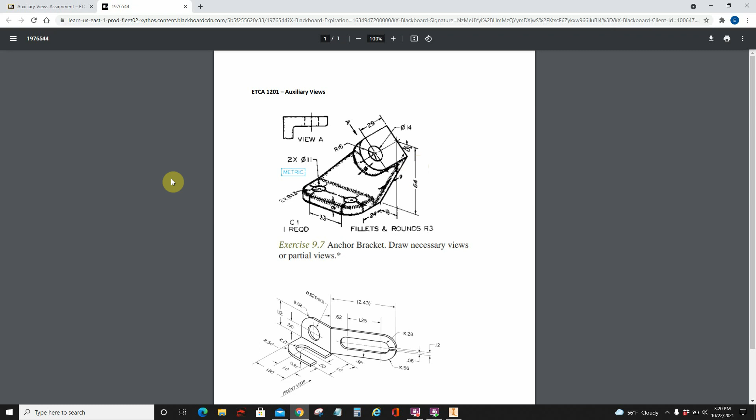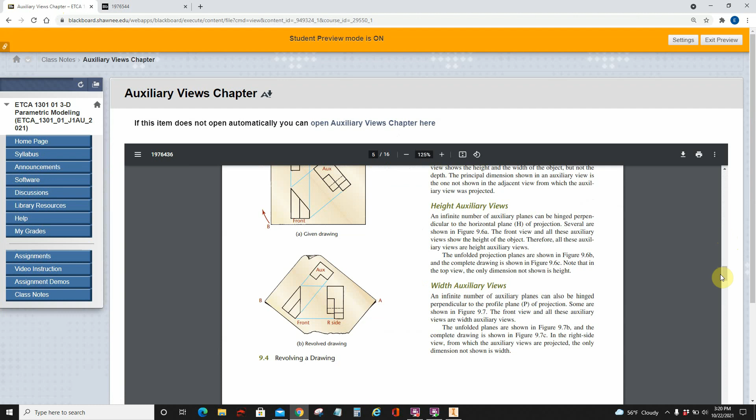All right, let's take a look at what we got here. Auxiliary views - we had the lecture, a little video. Here's the assignment, and I take it that you watched everything. It's also a chapter - I read the chapter about auxiliary views so you know exactly what's going on as far as how we're going to construct these things.

All right, I'm going to jump into construction, starting with the anchor bracket here. And a little construction video for each, and then a drawing video. So start with the anchor bracket here.

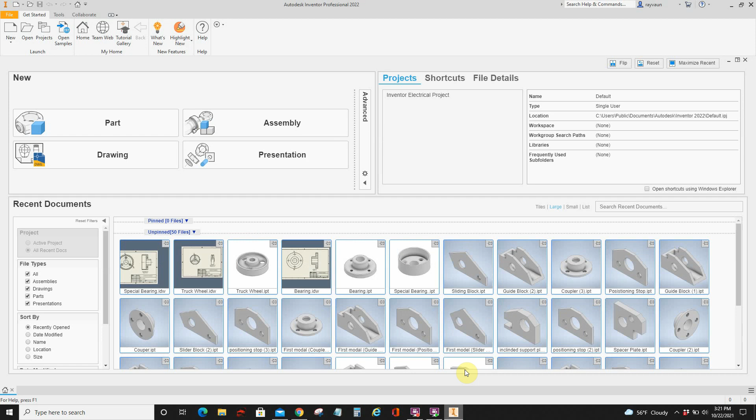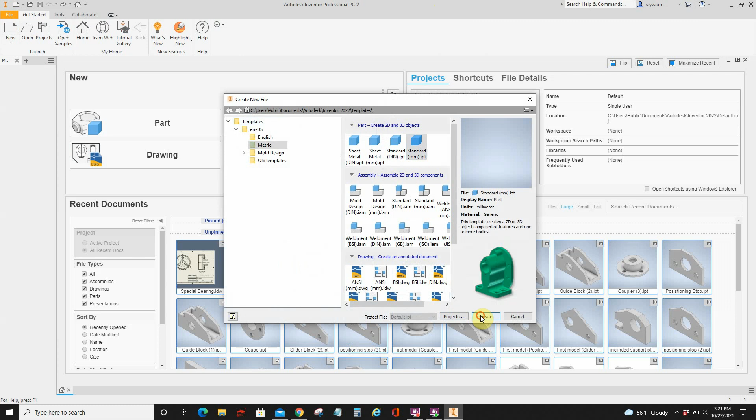And that's metric - metric standard millimeter part. Okay, what happened? Let me try it again. Metric standard millimeter part. There we go.

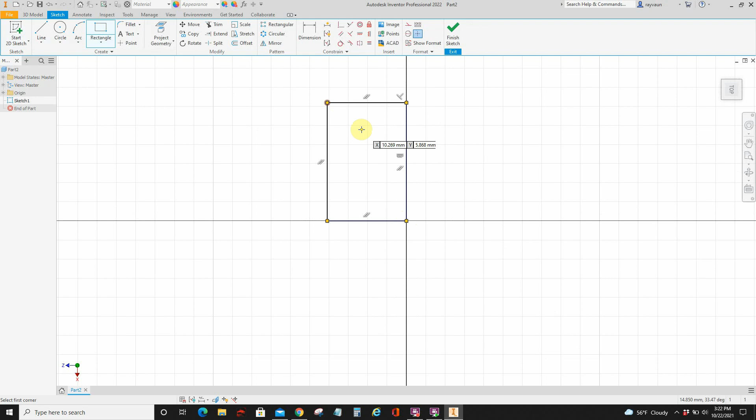What I'm going to do is build the bottom base first and then build off of that, so I'll use this as the plane I'll work on. I'll start with a rectangle here and put those dimensions in.

We got 24 from the back face to the center of the holes, and these got a radius of 13. So that'd be what the total on the bottom would be - 37. So like that, 37. Then we got 33, and 2 radii on each side, because we got 13 here and 13 here, which is 26. So 33 plus 26 is going to be what - 59. That sound right? 33, 26, 59.

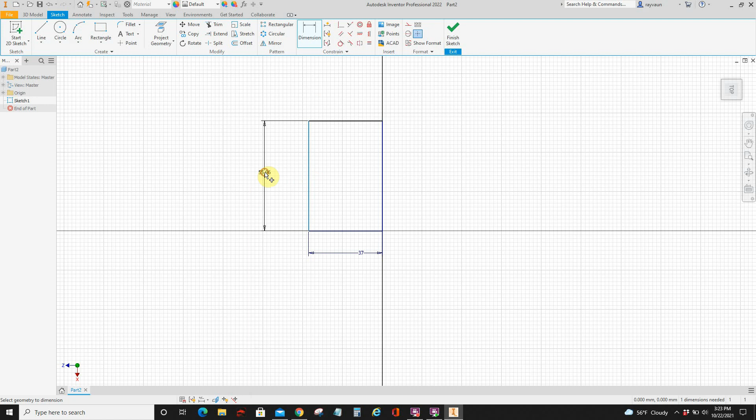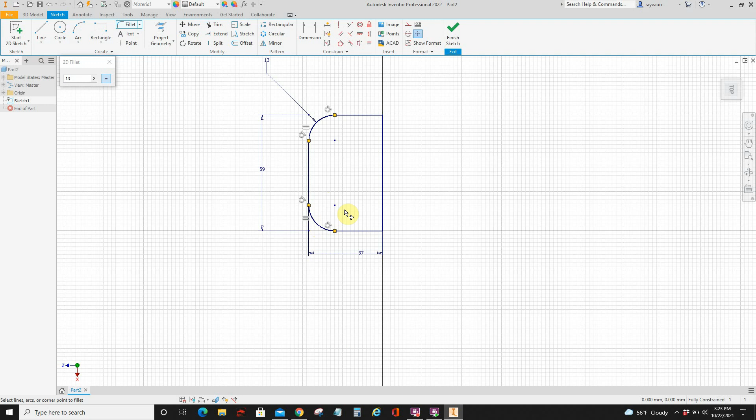Okay, we have a radius of 13, so we'll put them in. Right now, fillet 13, here and here. Then we have holes, 2 holes with diameter 11 that are at that concentric, same center point. Row 11.

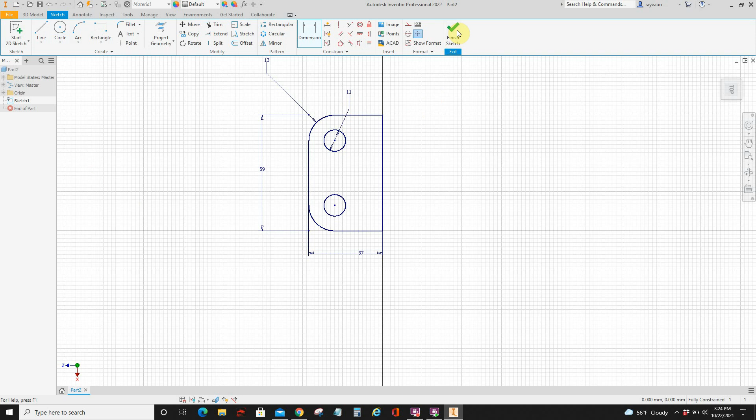Okay, I'm going to extrude this up - coming up 9. So extrude up 9 millimeters.

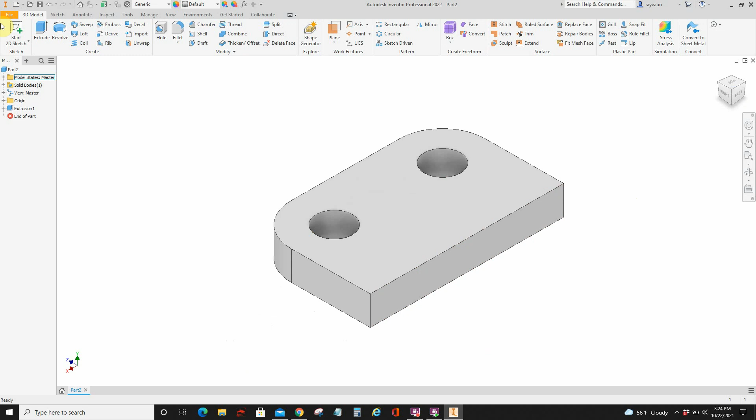Okay, so now we want to build this portion here. So I'm going to put a sketch plane on this face right here. Let me flip it around because I want to draw it from this side. And I'm just kind of drawing this shape here.

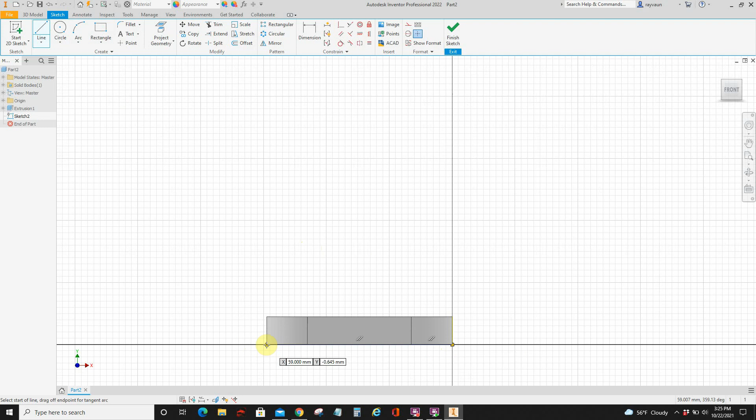It's kind of, well, here, here, here, and then up to here somewhere. And down like so, and then down like that. Thereabouts - something like that.

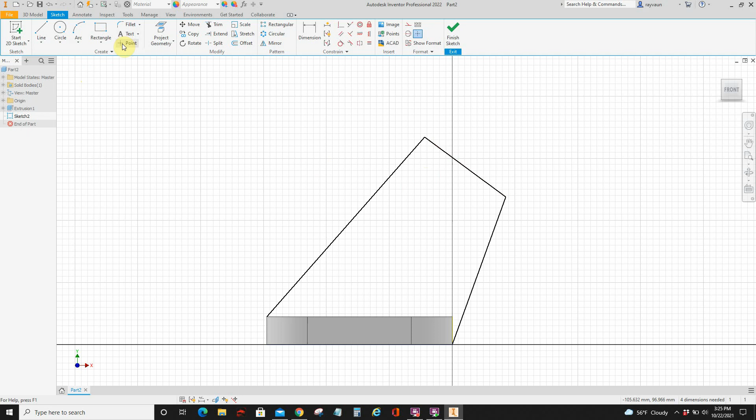We have the midpoint here - we got to measure off this midpoint. So I'm going to put a point on this midpoint so that I can grab it with a dimension line. I'm going to use the point command and stick it on the middle of this line. I'll mouse over till I get that green dot, and I'll place that point there. I don't know if you can see, does it get larger? Not really - there's a point there now. So now I can dimension to it.

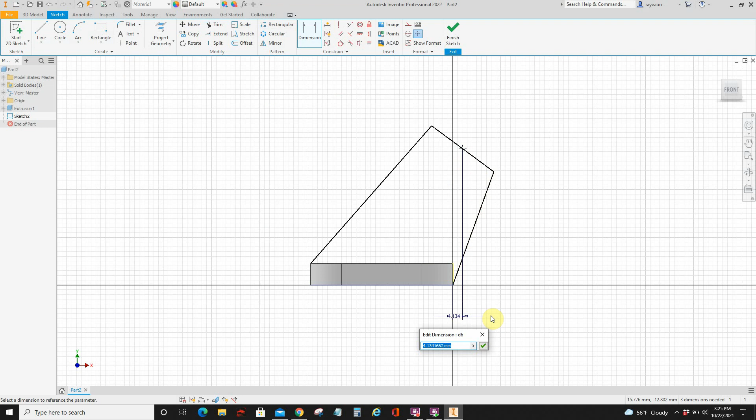So we're 19 over, so we'll put a dimension between this point and this edge - put 19. And we're 64 up, here to here - this is all going to be whacked, 64. And I need a 45-degree angle here.

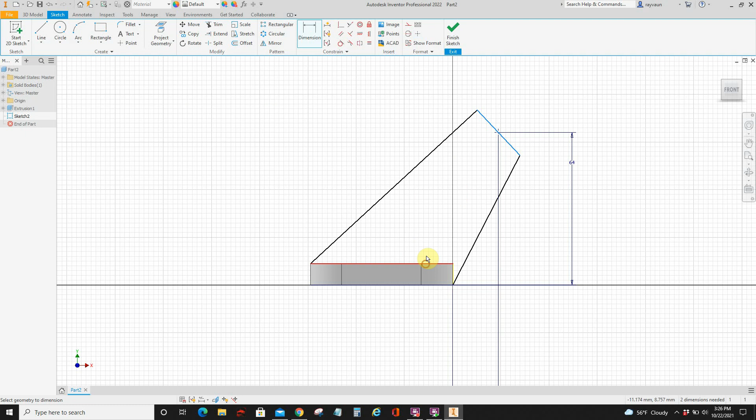I'm going to pull that out like that. There we go - so I need this to be a 45-degree angle. So I'm going to put an angular dimension in between here and here at 45. And this distance is, well, we got a radius of 16, so that's going to be 32 from here to here.

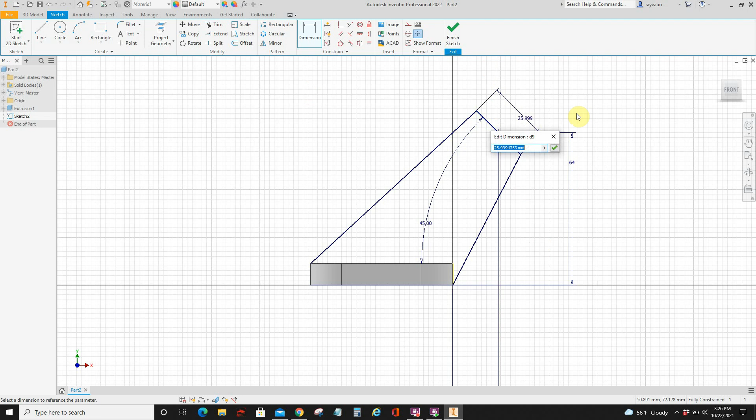16 is 32, so put a dimension - it's an aligned dimension, so don't - make sure that you have an aligned dimension, 32. You don't want to do that - you want to make sure that you have it aligned. Okay, and we got a thickness of 9. And I think I got everything here - 19, 64 from this corner, from down there.

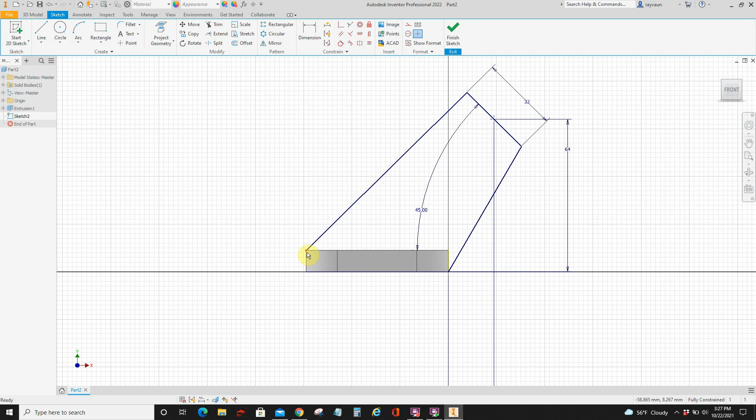Finish the sketch, and we're going to come out with extrusion, flip it, and 9 millimeters. Okay, so there we go - so far, so good.

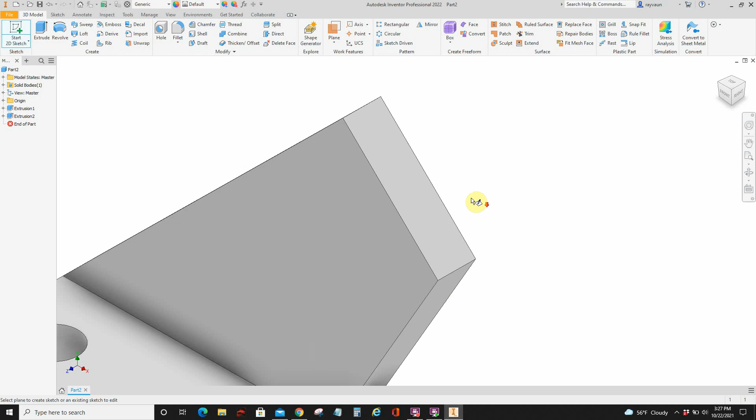Now I want to build this shape, so I'll put a sketch plane on this surface right here. And I'm just going to draw it up here and then move it down later. Put a rectangle, put a circle, midpoint. We got what, 29 millimeters here from center to this edge.

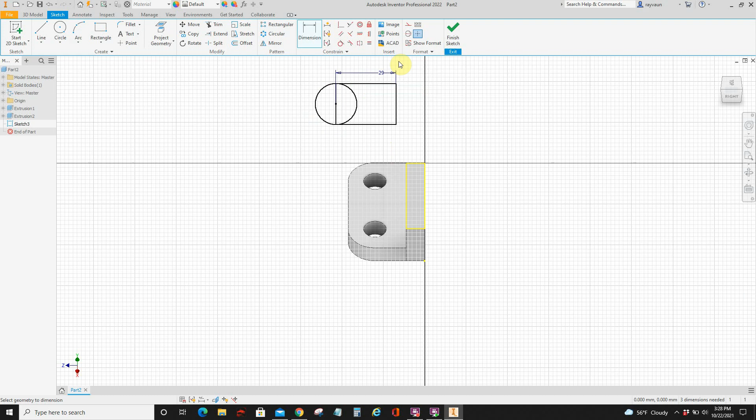We got a radius of 16, so let me trim this out so I get a radius instead of a diameter - radius of 16. Make sure these are tangent too - that's really important.

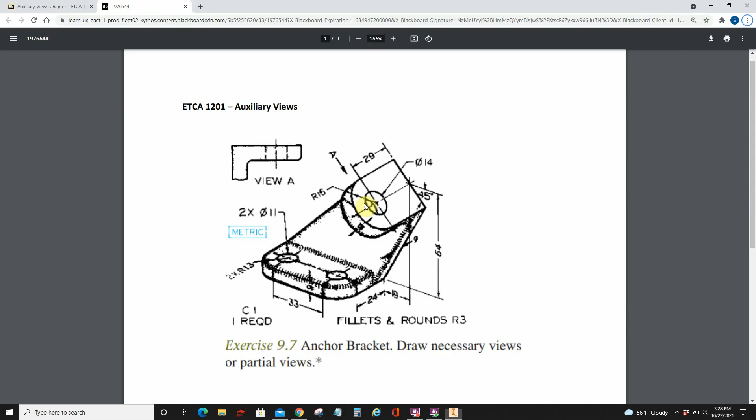And we want a circle with a diameter of 14. I'm going to make sure it's concentric to this arc, so if I move it, it'll move with it. Okay, it's already there.

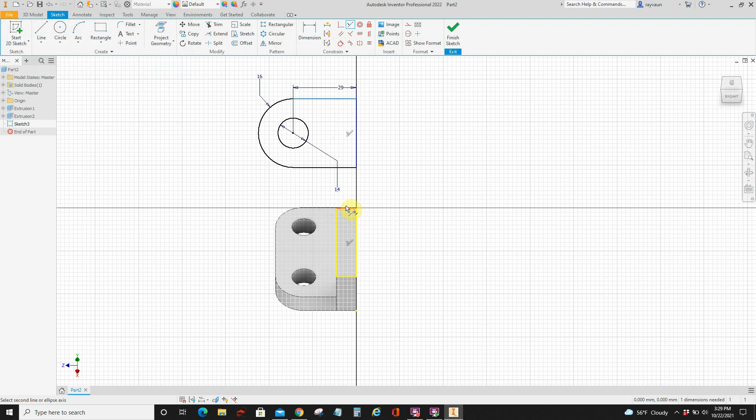So then I'll make this line collinear with this line, and then I'll make this line here collinear with this line there. Yeah, got the right line - you get the right line, not that line, but this line, because they're a little bit off, a little different. Finish the sketch and see it's right on - that's the way we want it. Right there, nailed it.

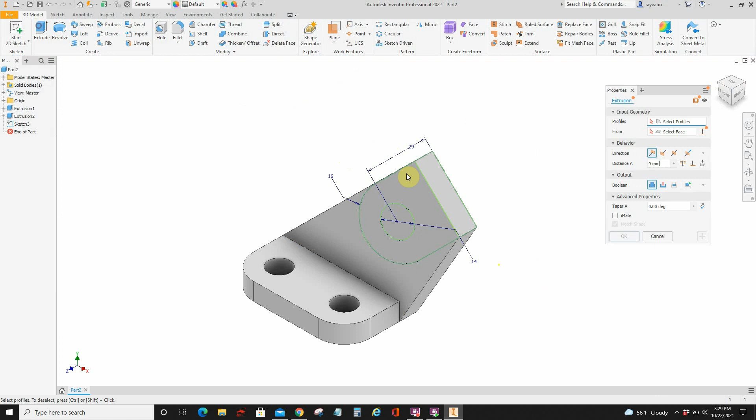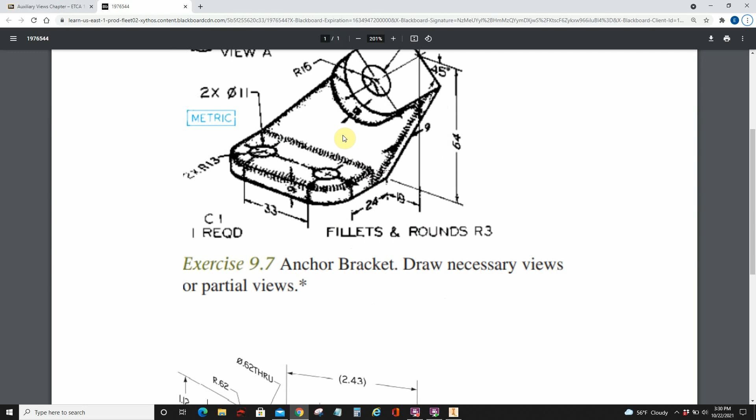Okay, so we can extrude this down - flip that. It's really hard to tell what that distance is, because we got 9 here, 9 here, so you can assume it's 9, but it looks like it might be a little fatter. It didn't reproduce real well - I don't know if it's 10 or could be 10, 12. I'm gonna put 9 - 9 is good, just use a 9, keep it uniform.

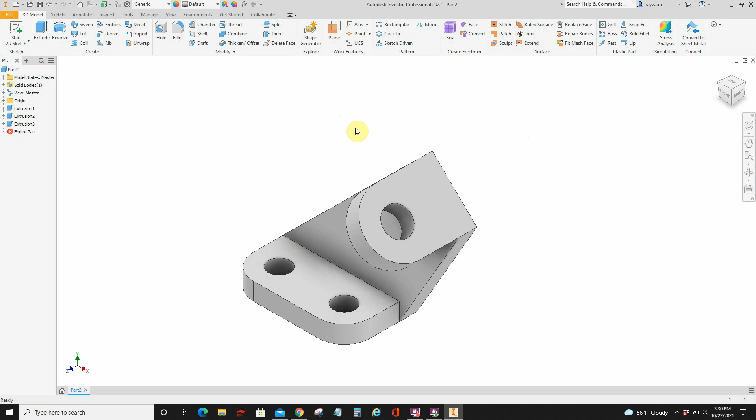Okay, so now we need to put the fillets and rounds in. It's rounded on the front, but you can assume that the back and the top and everything is machined. So you gotta be real careful when you're doing this, because sometimes the way it's drawn, it may take a couple different tries to get all the fillets in.

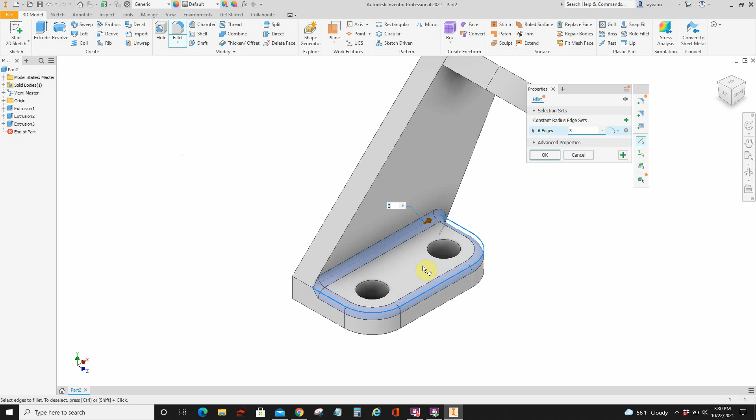Radius 3, so fillet - radius of 3. I'll start down here and do this - see if that works. So far, so good. Where's my apply button? It doesn't have an apply button. Okay, so continue.

I got these new commands in here, I don't know if I like them. I'll put one here - we'll take it, that's good. Let's go up here, get that, and that - so far, everything looks good.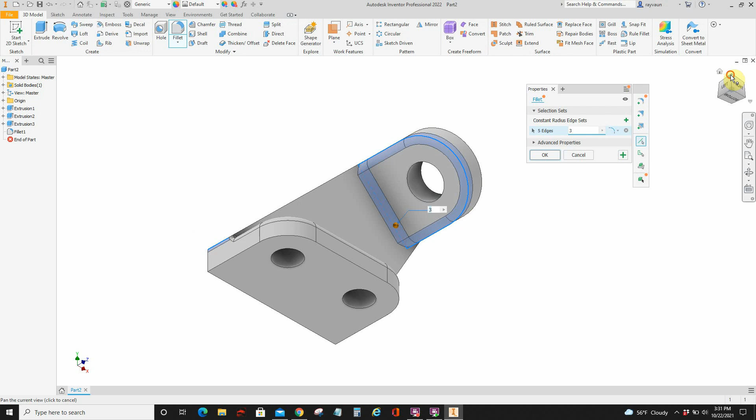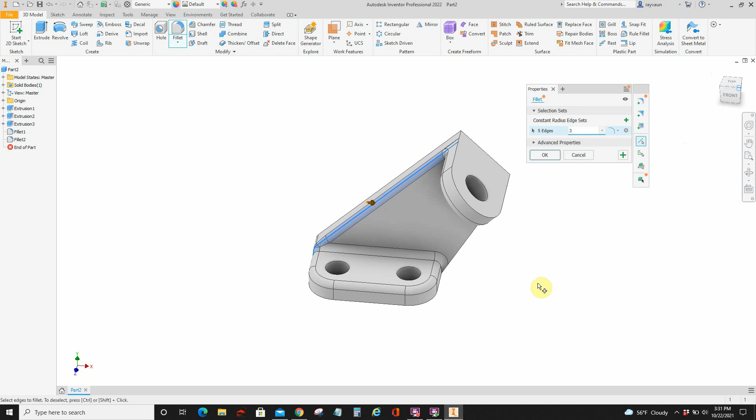If you get a weird color, it's not blue, that's kind of telling you that it's not going to work. So I take a little bit at a time instead of doing everything at once, because a lot of times it just says forget you, and it don't work. So we got to put the fillets on this right here, on this edge, and hope that works. On here, we're good so far. On there, okay, very good.

Fillets have gotten much better than the older version, like that work - I was having all kinds of problems with it. And that should be everything. Yeah, I got them all. How about that? Okay, so I'm going to save this for now, and then we'll put it into a drawing file in a later video.

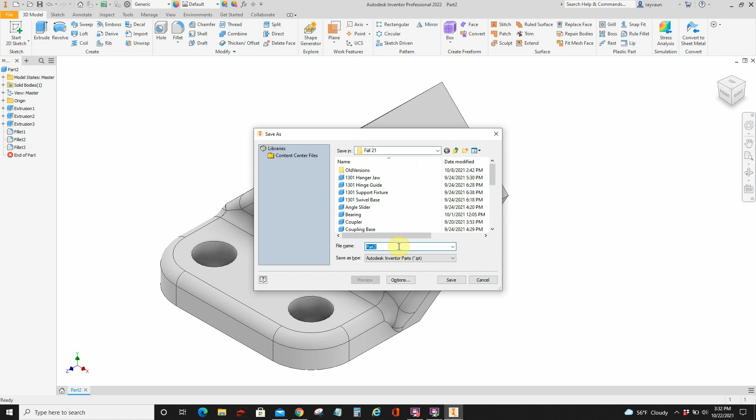So this is the anchor bracket. All right.